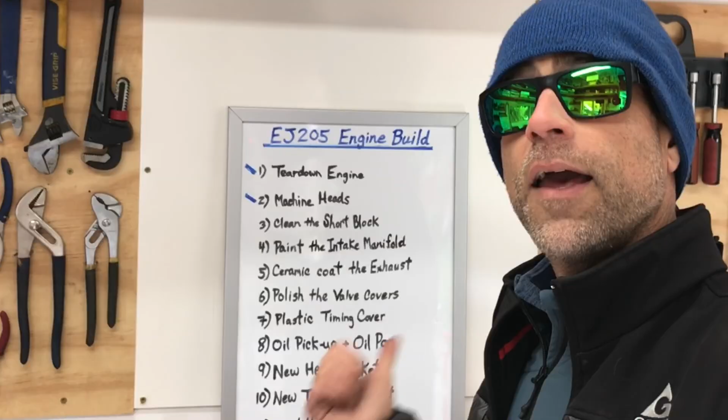Before I jump into the 5 steps we're going to use to clean the short block, I want to remind you guys that this video is actually a video in a build series where I'm swapping a 2005 WRX engine into a 1998 RS Coupe. In an earlier video, I actually put down 12 steps on this whiteboard behind me that's going to walk us through this entire video series while I rebuild this 2005 WRX engine, which is also known as an EJ205 motor.

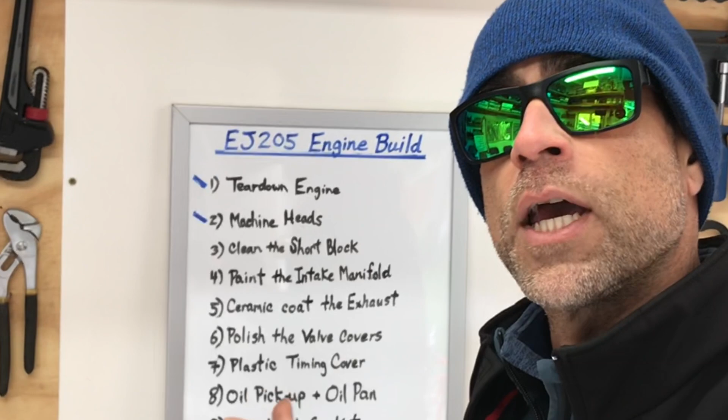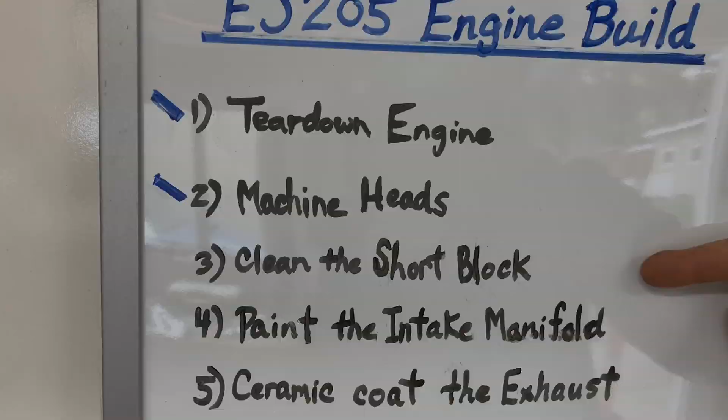As I zoom in for a close-up, you can see I've actually knocked off the first 2 steps, tear down the engine and machine the heads. In today's video, we're going to walk through step number 3, which is cleaning the short block. And to walk us through cleaning this short block, I've actually put 5 steps on the whiteboard behind me. Okay, now here's the 5 steps that I've put together for cleaning this short block.

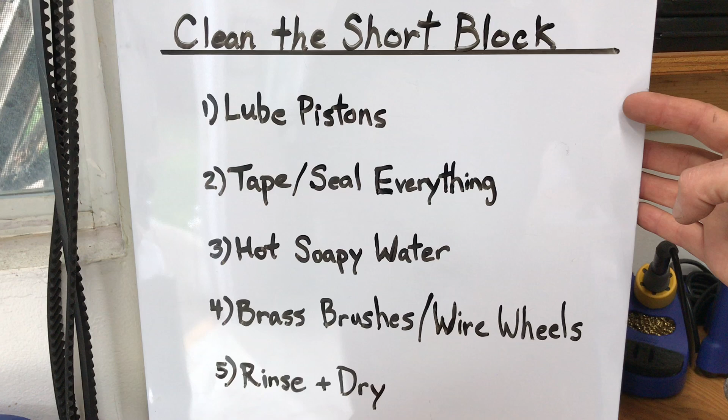The first step is going to be lubing the pistons. In that step, we're actually going to use a little 30 weight oil or a little assembly lube. We want to wipe down the inner cylinder bore so that we make sure we don't get any water in there, and if we do get any water in there, there'll actually be a coating of oil on the cylinder walls first. The second step will be to tape or seal everything off.

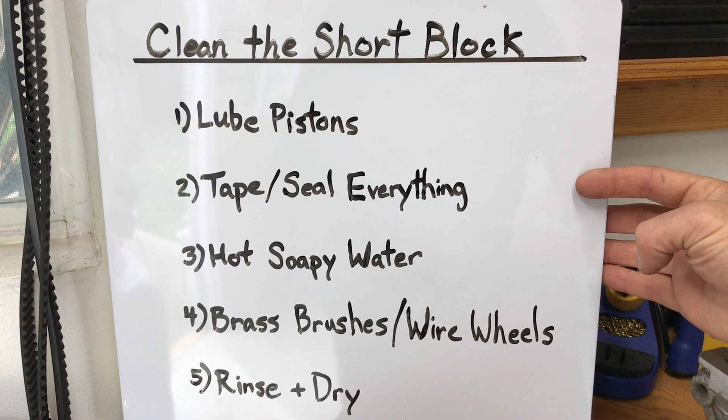There's a bunch of little ports on this engine, and we definitely don't want to get any water inside the engine, so we'll tape and seal everything off. For this step, I use silicone caps and a lot of blue painter's tape. And then as we move down to step number 3, it's pretty self-explanatory. That's just hot soapy water.

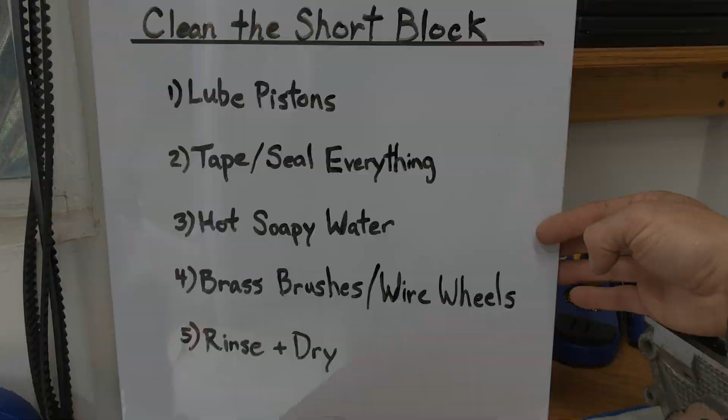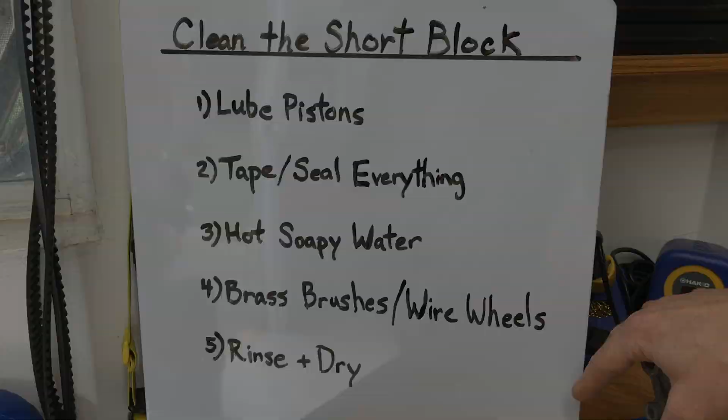And step 4 is really the difference maker. That's where you use brass brushes and brass wire wheels to really get a deep clean on this motor. And then we'll move on to step number 5, which is where we'll rinse the motor with clean water and then completely dry it. Alright, and that's basically the 5 steps that I'm going to walk you guys through today with my EJ205 motor. I've already got the engine rolled outside, so let's head outside and start this process.

Okay, step 1 is going to be lubing the pistons, and that involves cleaning those cylinder bores and then applying some kind of lubricant to the inside of those cylinder walls so that if any water gets in there, the cylinder walls are actually protected and no rust will form. Anytime you're assembling an engine and you're using oil as a lubricant, a lot of times you want to use a 30 weight oil instead of a multi-viscosity oil, because a 30 weight oil will actually cling to those cylinder walls a little bit better, which will protect the engine all the way through till startup.

Now you can also use a high quality assembly lube like this Red Line assembly lube, and this stuff is actually specifically formulated to be really thick and viscous so it sticks to those cylinder walls really nicely too.

One more thing I'll point out is that I use this cheap little 99-cent ketchup container to hold my oil. It works great, it's got a nice little funnel spout on it, and it's got a nice little cap on it so you can control the flow of the oil to specific little spots, and you can cap it off when you're going to store it. These work great and are usually less than $1. Anytime you're going to lubricate the bores of your cylinder walls, you first want to clean them with something like this microfiber cloth.

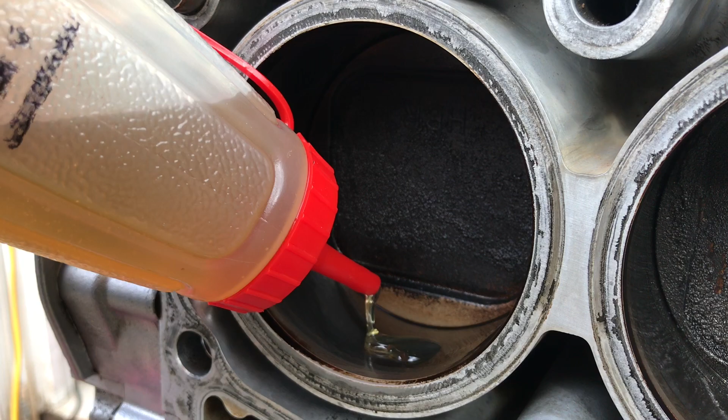So get in there and clean that sucker up. I don't worry about cleaning the carbon off the pistons at this time, but for right now, I just want to keep those cylinder walls clean and lubricated. And then go ahead and take that 30 weight oil and apply a nice thin coat to the entire cylinder wall. I like to use my finger to spread it around evenly.

Alright, that's step 1. We can move on to step 2, which is sealing off all the ports and taping up this engine. That way we don't get any water inside any passages where we don't want it. That's a really important step, so definitely don't skip it. Okay, so step 2 is going to be to tape and seal everything off. Now to do that, I actually use 2 things. I use this blue painter's tape. This works great, and I use this to seal off the combustion chambers and a couple other passages.

And I also use these silicone caps. These work great to seal off little ports and passages all over these engines. And here's 2 examples of where I'm using those silicone caps on the thermostat housing. So go over your engine and completely seal it off using that blue painter's tape or those silicone caps.

Okay, we're gonna go ahead and tape up this engine, but you guys are probably already noticing that this engine is already looking pretty damn clean and polished. And that's because I've already gone through all these steps for most of the parts of this engine. I'm actually going to redo these steps with you guys so I can walk you through the steps, and I'm going to get all the little spots that I actually missed. That way this engine is completely polished clean and is going to look legit when I go ahead and put it back in that GC8 coupe.

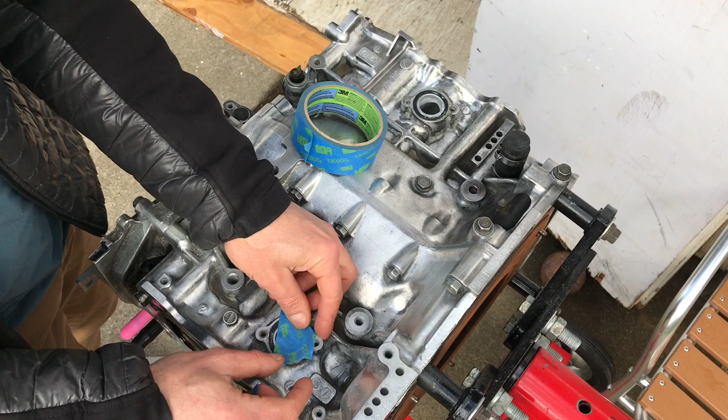Now the first thing we're going to need to seal off are these coolant crossover ports. That's this port right here and this port right here. So just grab that blue painter's tape and go ahead and apply it over that port. Tear off a little strip, put it down over the port, and tear away any of the excess, and then make sure it's just nice and tight. We basically just want to seal off that port so no water and no debris get into that passage as we're cleaning this thing. And that's basically good enough. That's all we're really looking for.

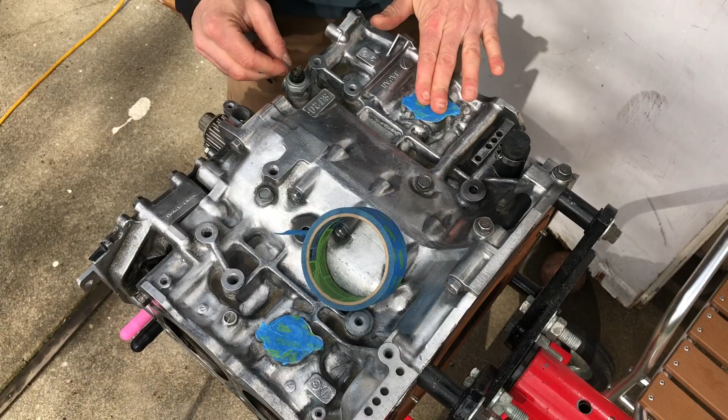Next we'll move over to the other coolant crossover port. Get that sucker sealed off. This is definitely one of those processes where you want to take your time, you can't rush it, and the more time you take, the better it's going to turn out. So you get that tape down, you get that port totally sealed off. You don't really need to worry about sealing up any of these little thread holes. Those are all blind holes, but we are going to make sure we blow all the water out of these little thread holes at the end of this process.

Okay, and then rotate your engine. Well, let's go ahead and seal up this combustion chamber. Okay, now to seal up this combustion chamber, we're actually going to use blue painter's tape. That's a great option because it doesn't leave a lot of residue, but it'll actually seal off the water pretty damn good. But to allow this blue painter's tape to make a good seal with a metal surface, you actually got to clean that metal surface and remove as much of that oil residue as you can. That way this blue painter's tape sticks really well.

So start with a clean rag and just clean off all of the perimeter and all of the mating surface where your head gasket goes. And then apply just a little bit of glass cleaner or something equivalent to that rag and go around the surface and gently remove all the oil residue.

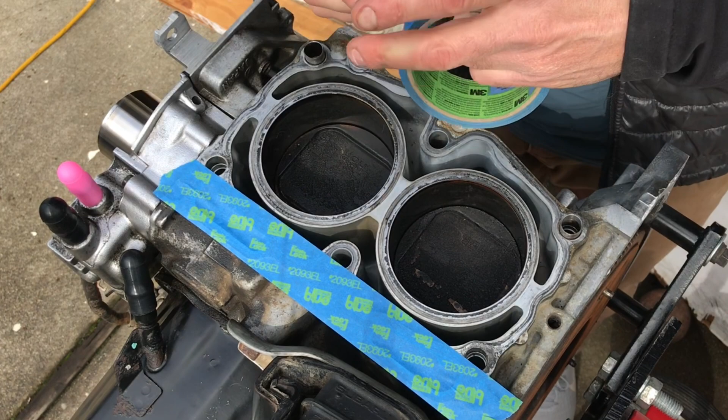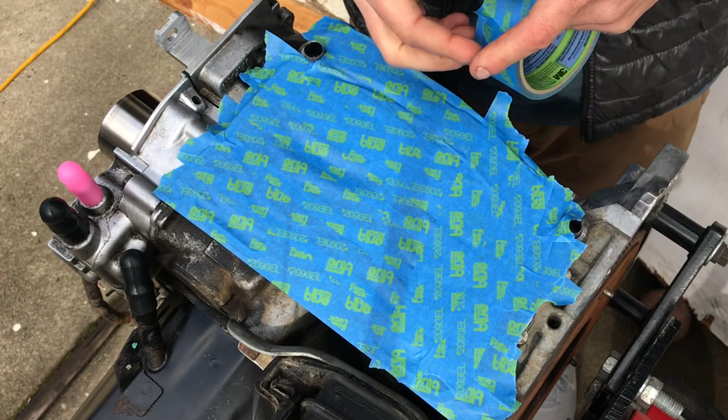That'll help allow that painter's tape to make a really good seal. Okay, now you should be ready for some painter's tape, so go ahead and put down some strips the width of that cylinder head. Just work your way up from the bottom up to the top, or from the top to the bottom, doesn't really matter. And then I apply a little bit of tape perpendicular to the direction that I put the first layer down. Definitely go ahead and seal these locating dowels too.

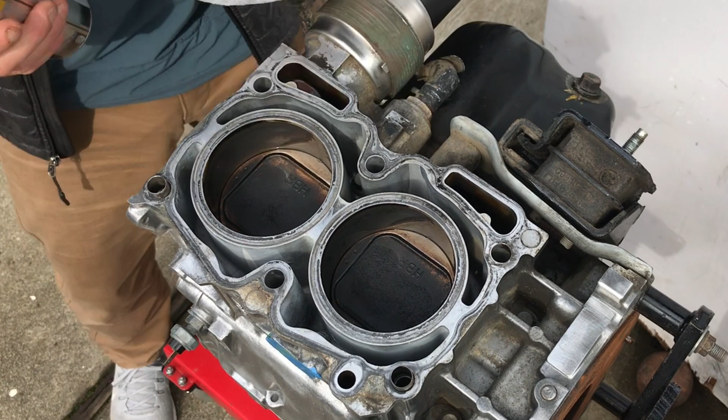Alright, that should be good for this side, then rotate the engine and go ahead and do the other side. It's pretty straightforward. Let's go ahead and do that now. Clean that surface up, get all the oil residue off it. That way that painter's tape can make a good clean connection. And then go ahead and take that blue painter's tape and apply another layer of the tape to seal off the combustion chamber. And then perpendicular again to the direction of the first layer. All right, and that combustion chamber is completely sealed, watertight.

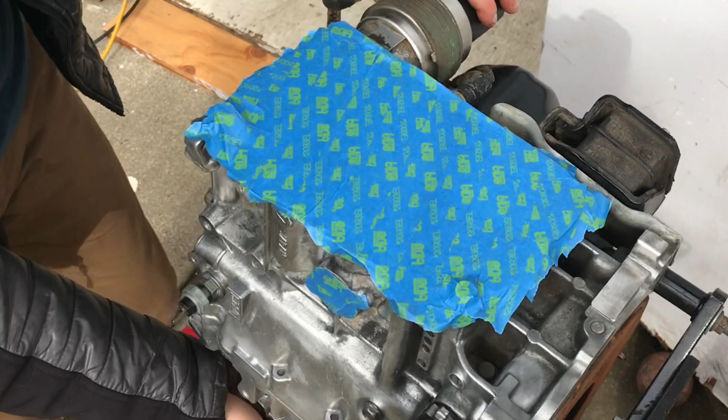Okay, let's rotate this engine, take a look at where we're gonna go next. All right, this engine's looking really good. It's just about completely sealed off, but there's one more thing you wanna think about. If you're gonna leave your water pump on and your oil pump, you wanna make sure anything over on the front of this engine, behind your timing assembly, is completely sealed off too. And for that water pump, this actually has bearings in it. You don't wanna get water and rust on the inside where these bearings are.

I actually use a little plastic water bottle base that I cut with a pair of scissors. It actually slides over that really nicely. Now it doesn't make a perfect watertight seal, but I'm not planning on spraying this with any heavy water directly. That will actually protect most of the water from getting into that bearing. And then I'll make sure I dry it completely, and I'll use a pressurized blowgun to get inside there and make sure we don't have any standing water and no rust develops.

Okay, that's it. We're done with step number 2. This engine is completely sealed off. It's now watertight. We can go ahead and rinse it with some hot soapy water and get all the loose and heavy oil and debris off it. That way it's nice and clean and ready to take our wire brushes and our wire wheels to give it that fine, clean polish.

Now I have to mention that the correct way to clean these engines is actually when they're split and completely disassembled, and you can put them in some kind of wet media blaster and completely clean them from the inside and the outside and every angle. But most people out there are gonna be like me, and you don't have that expensive wet media blast equipment at your home shop. You're basically gonna be disassembling the sucker in your garage and cleaning it while the heads are being resurfaced at the machine shop. That's the reality of the situation, because that's the fastest way to tear down an engine, replace your head gasket, and get it back in the car. So I'm going through all the steps that most of you guys will probably end up with in your projects.

Okay, for the next step, which is step 4, on the whiteboard behind me, I'm going to walk you guys through all the assortment of wire brushes and wire wheels I use to really get these engines completely clean. This assortment allows you to get into all the little nooks and crevices of these engines and really take this engine build to the next level.

Okay, we'll start off with the first tool, which is really just a regular wire brush. But the most important thing is that all these brushes are brass, because brass brushes aren't going to scratch this engine at all. They're just going to remove rust and grime that has built up on this engine over time. So make sure all of these brushes are always brass brushes. Okay, that's the first one, just a normal brass brush.

And then I use a small little brass brush, so you have 2. And then we get into the impact driver. This is where the difference really comes in, and this is where you can cover a lot of square inches on this engine really fast. Go ahead and find yourself one of these brass cone fittings, and you can find one that has a little insert. That way, it'll snap into your little drill extension like that, and you can use it to go over all those wide surface areas on the engine, like on the top of the engine. This attachment works really badass. I'm gonna show you guys how it works in a second.

But equally important is getting one of these little brass fittings. This sucker will allow you to get in a lot of those little nooks and crannies of this engine, but it's still a pretty good size, and you can cover a lot of square inches quickly. Again, this one has that same fitting, so it snaps right into your drill bit fitting really easily. This is a really important attachment to use. So that's the second attachment, the small cone shape.

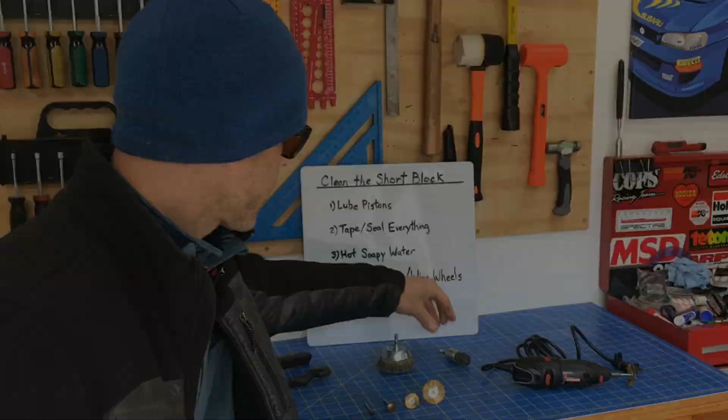Okay, next is the Dremel tool. This is the one that's really going to let you get into all the final little nooks and crannies of this engine and get you that last 5 or 10% that you can't get with the big sucker behind me. Again, for this Dremel tool, you still want to use all brass wire wheels. And I've got an assortment of them. There's this one, which is round and flat. This one works good to get in certain spots.

And then we have a smaller version of that one, which is also round and flat. That one will get into even smaller areas. And then there's a small little cone-shaped one, which is kind of a medium size. And then you have your fine little cone-shaped one, which is basically like the tip of a little paintbrush, but with those brass bristles. And this little sucker will let you get into all the teeniest little spots of this engine to really take that cleaning job to the next level.

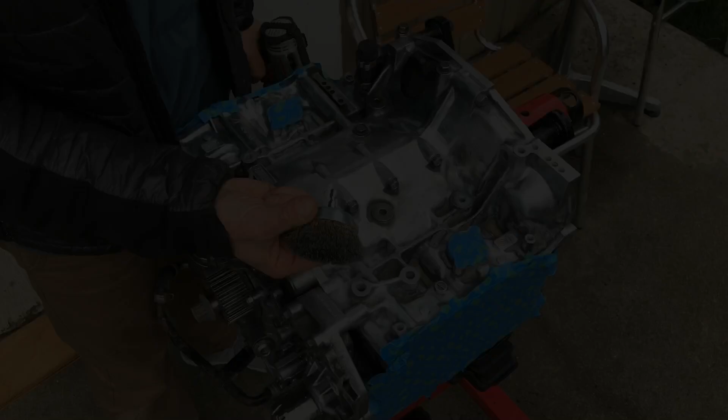Okay, we'll start off with this first big brass wire wheel attachment that goes into the impact gun or into your drill. Snap that into the tip and go ahead and start working over the surface. And that's all there is to it. Just go over the surface and really work the top of that engine and get it totally clean. I've actually already gone over this engine with this size wheel, so I'm gonna move on to the next size wheel to show you guys all the other spots you can get in.

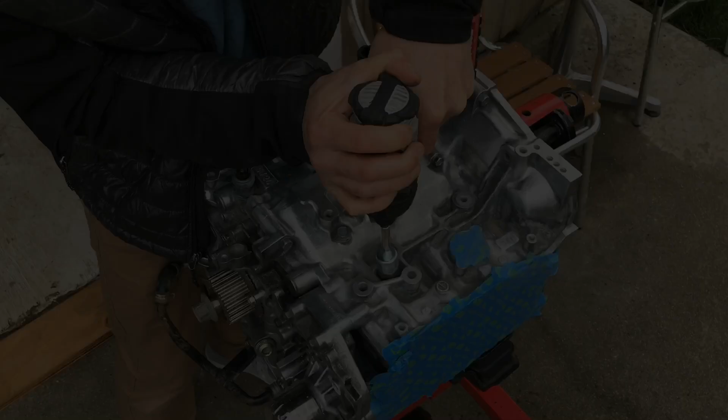Okay, here's the next size you wanna try. Again, that should snap right into your drill fitting. This little brass wheel will allow you to get into these tight spots, like right here, where the webbing of the engine creates these little crevices. As you get around the perimeter, just make sure you don't get over to the combustion chamber side. You definitely don't want to scratch the surface of this block where the heads are going to mate up to the block. So go ahead and use that bit to get into all the little crevices of this engine where that bigger one couldn't fit.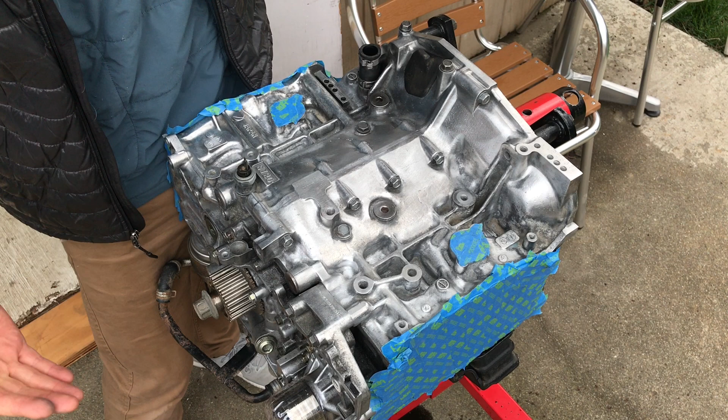Now, depending on how bad your engine is, this might only take 30 minutes, or you could be at it all day. Who knows? Put in as much time as you want. This is definitely a labor of love, and this is definitely going to be one of those extra steps that makes your engine separate or different from the next guy's build.

And after you've done that, and you've gotten every little spot that you think you can get with that bit, we're going to go ahead and move over to the Dremel size bit and really get into all the teeniest little crevices. Okay, I'm going to go ahead and use that Dremel bit. I got the smallest little attachment. I'm going to work it into these small little crevices.

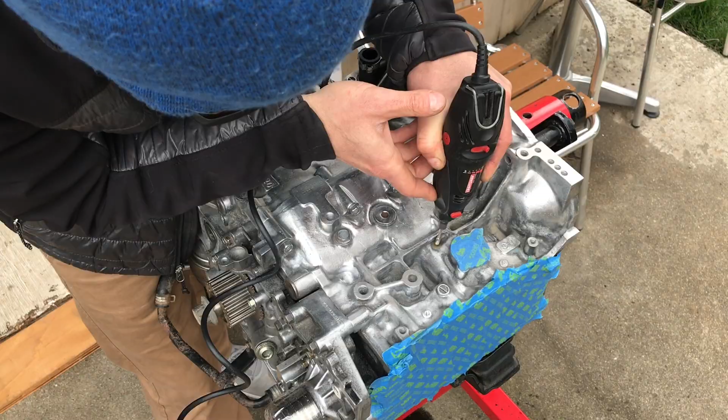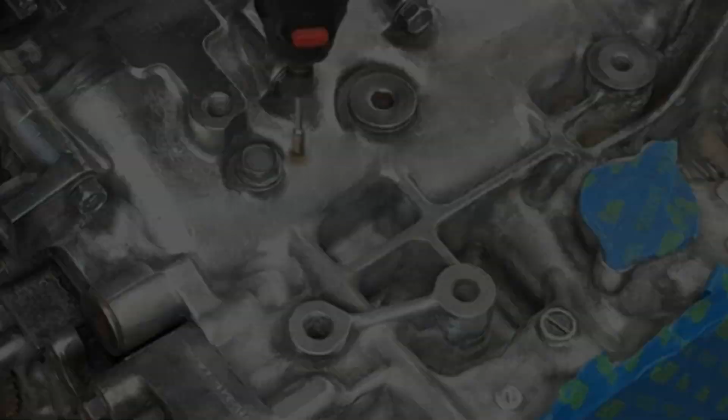Okay, now I'm gonna move over to this next size up with that little Dremel tool attachment with that brass wheel. Another thing I'll mention is that when you buy these, usually buy packages of 10 or 20 of them, because these little Dremel tool brass brushes are a lot softer than the bigger ones you use with that impact driver, and they're actually gonna bend and get torn up pretty easily. So expect to go through a whole packet of these little brass brushes for the Dremel tools if you're gonna clean your engine.

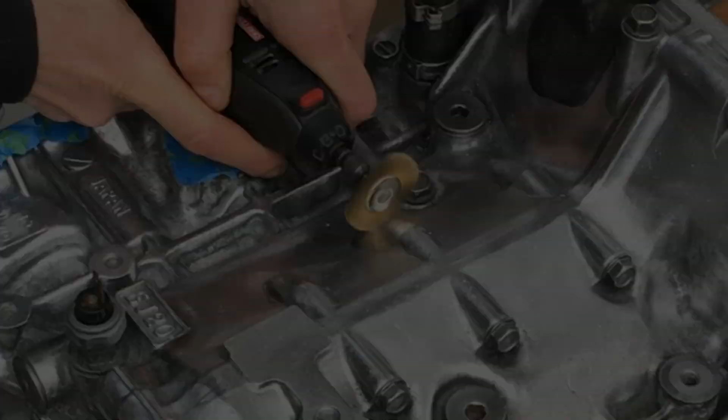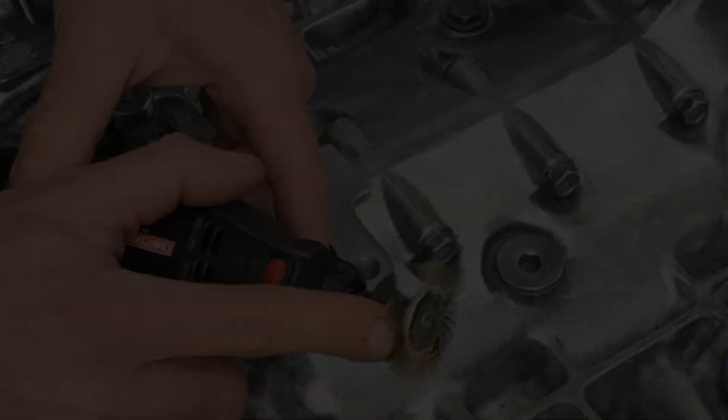Okay, now I'll go ahead and apply that little bit larger brass wheel. Always make sure you're wearing safety glasses anytime you're going to use a Dremel tool with these brass wheels. As you can see, a lot of these little hairs are flicking out. If you're not wearing safety glasses, these little brass pieces of wire can end up in your eye and it would quickly take you to the emergency hospital. So definitely make sure you're wearing safety glasses anytime you're using this tool with this kind of attachment. All right, I'm gonna go back to this size wheel, see if I can finish this sucker up.

Alright guys, after you think you've got all you can do, next step is going to go ahead and rinse this sucker off. So I'm done with step 4. I'm going to go ahead and do a clean rinse on this engine, and then I'm going to go ahead and dry it completely. I'm even going to use an air gun from my air compressor. That way I get every little bit of water off this sucker, and I can put it away completely dry.

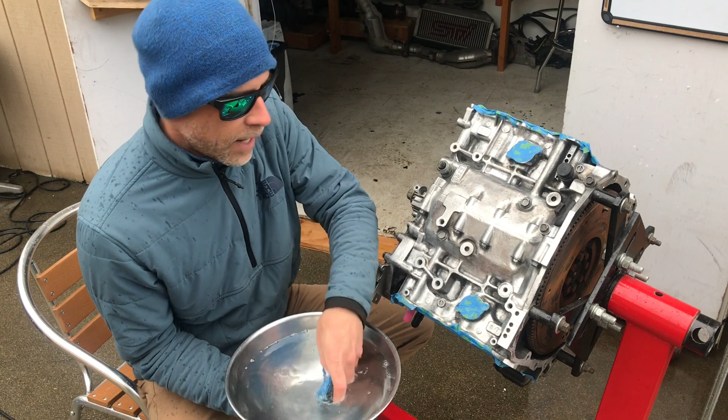Okay, we're now ready for step number 5, which is to rinse this engine with clean water and then completely dry it. Now for the clean water rinse, I'm actually going to use a non-scratch Scotch-Brite pad. I'm just going to lightly douse it to kind of remove all the debris that is built up in these crevices. Just kind of go over all the spots that you've used those brass brushes and those brass wire wheels on, and give it a light scrub and loosen all that debris so it just streams off the engine.

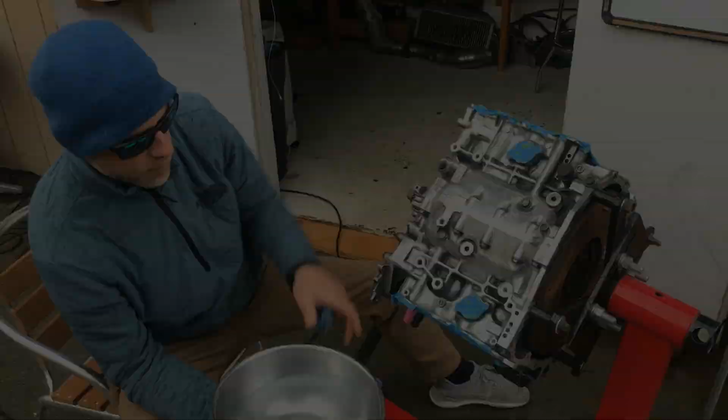After I've got this side, I'll go ahead and rotate the engine. We'll go ahead and do the other side. It helps to keep this engine at about a 45-degree angle. That way, all the water just sheds off. And then go ahead and get in all those little crevices. Make sure you get all those little bristles from those wire wheels that broke off. You want to make sure you definitely rinse those all off.

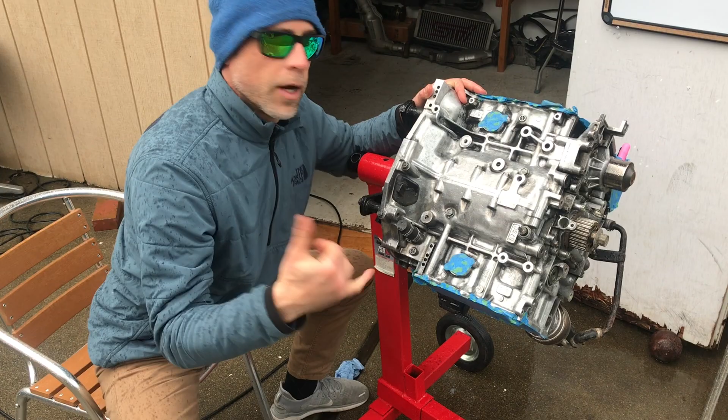All right, that's looking pretty good. I'm gonna go ahead and rotate the engine all the way over. Let all the water drain out. Rotate the engine a couple times. And I'll take a bunch of clean rags, and I'm going to dry this engine, and then I'm going to grab my air compressor with a little nozzle on the tip, and I'm going to spray this engine down to remove all that standing water. That way no rust develops anymore on this engine.

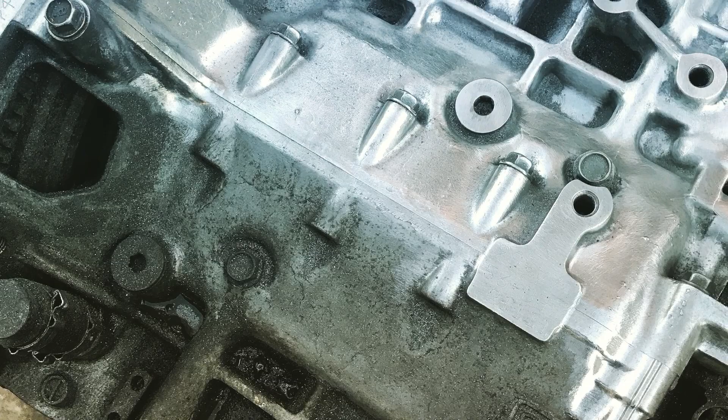Okay guys, I've completed step 3. I completely rinsed this engine, and I've dried it with a microfiber towel, and I've actually blown it dry so there's no standing water anywhere on this engine. I think it looks pretty awesome, and if you compare it to where it started, I'll throw up a couple pictures real fast so you guys can see half of the engine that was still oily and greasy and grimy, and the other half that was already polished. So you guys have a better idea of how well this process works and how much you can actually clean that engine up from start to finish.

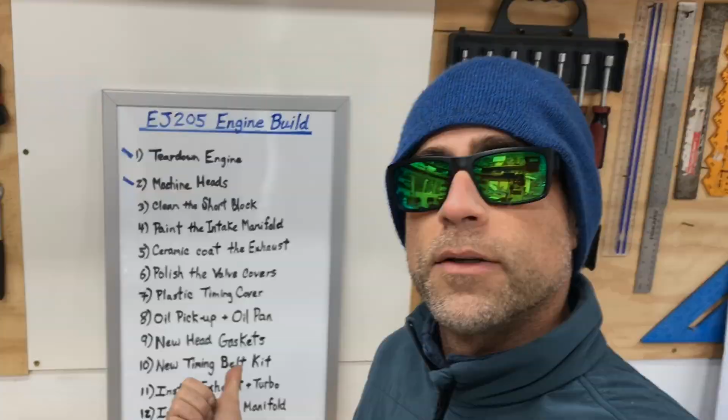So we're done with this step. The engine's completely cleaned, and we're ready to move on to the next step on this EJ205 engine build series. So let's head up to that whiteboard and let's knock this one off the list, and let's take a look at what's next. Okay, here's that list for the EJ205 engine build. We've completed our discussion on the engine teardown, we've completed our discussion on the machining heads, and now we've cleaned the short block, and I'll knock that one off the list. Next one on the list is painting the intake manifold. But you guys will have to wait for that step in the next video.